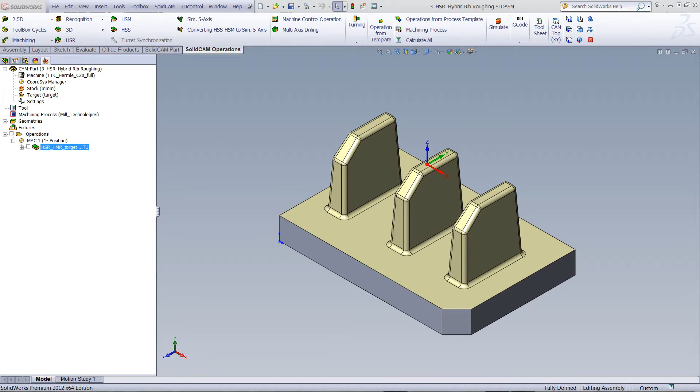If I were to open up my operation, you can see we have the operation of hybrid rib roughing. We have our geometry, we have our tools. I'm using a 10mm end mill. We have our constraint boundaries as shown over here. And then we have our passes. In my passes, I'll be going down up until this surface over here. I've also done a step down of every 1mm, and I'll get back to that in a moment.

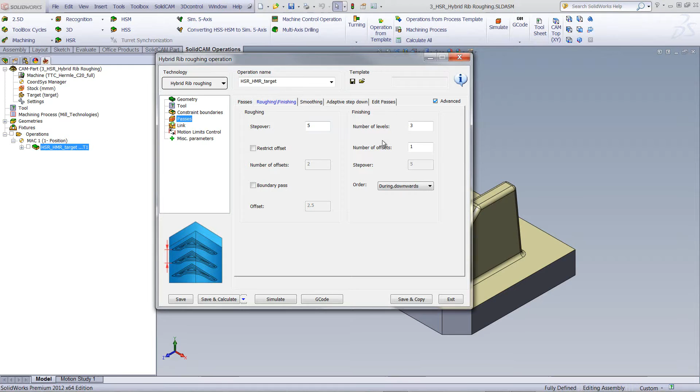Next in our passes field, we have this new option here called roughing finishing. In roughing finishing, we have our step over, how much we want our tool to step over every single time as it gets closer to the actual rib itself. And then we have our number of levels. What number of levels does is as follows.

As I've mentioned before, we had our step down of every 1mm. The number of levels will actually go down that total amount 3 times. In other words, it'll go down 3mm towards the bottom, and then it'll clear it off up until 5mm before the wall itself. Once it gets to that point, it'll clean each step 1mm at a time until it gets down to the level that the roughing cut got to before. Once it does this, then it'll go down to your next number of levels and do the same thing again every 1mm. Let's take a look exactly how this works.

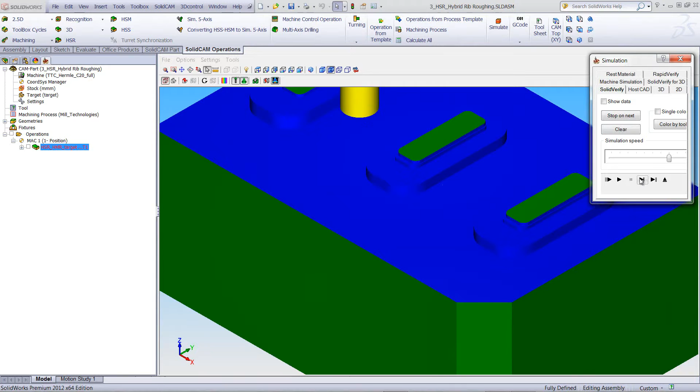If I were to run my simulation, you'll see the tool is working now from the outside, and as it gets closer to the rib, you'll see that it'll stop. And now, I'll zoom in over here. It had cleared down up until here, and now it's going down that 1mm that I talked about. As it goes around the part, you can see now it'll go to the next rib, clearing off 1mm on that one, and then to the last rib over here, again clearing off another millimeter.

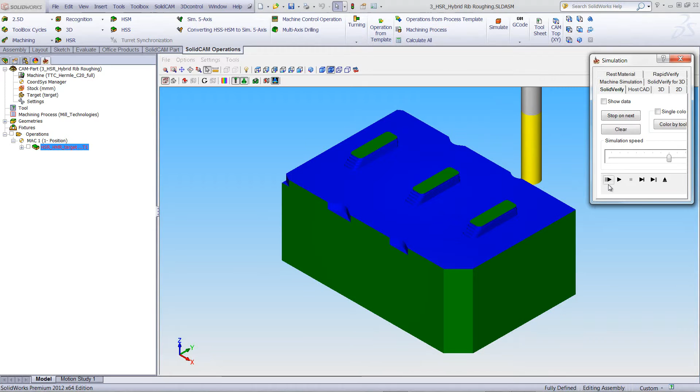Once it finishes that 1mm, it'll then go down to the next millimeter, clearing off that step, again to the next rib, another millimeter over there, and then to the third rib, finishing off that millimeter. Once it finishes off that step, then it'll go down to the next step, and it will do this on this entire part until it gets to the very end over there. Once it gets down to the floor itself, then it'll go down to the next level, repeating the exact same thing it did before, making those small steps.

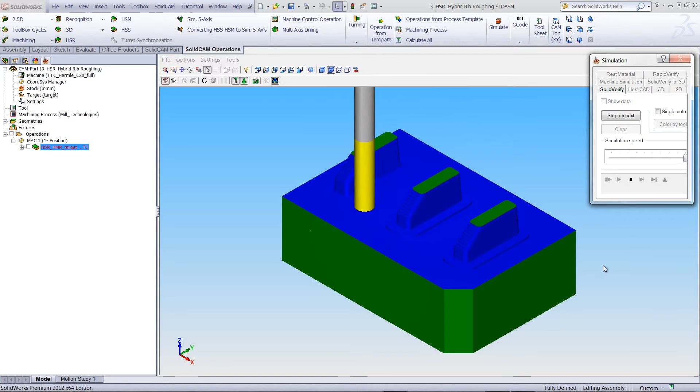And notice the advantage of this is it leaves a lot of material on the bottom, keeping it strong as it's working its way down, avoiding breakage of the ribs as it clears all the way down to the very bottom of the part. Now, let's go back into our passes, into our roughing finishing, and take a look at some of the other options that we have over there. We have here something called restrict offset.

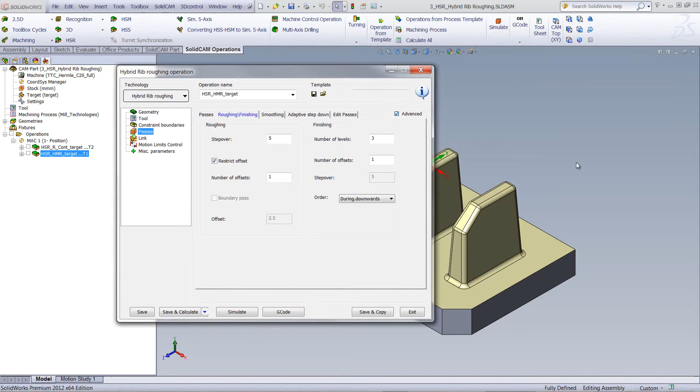What this does is minimize the amount of offsets you're doing from the part itself, and this is especially good when you have a part that was pre-machined and most of the material is taken away already, but there was material left over to do finishing operations.

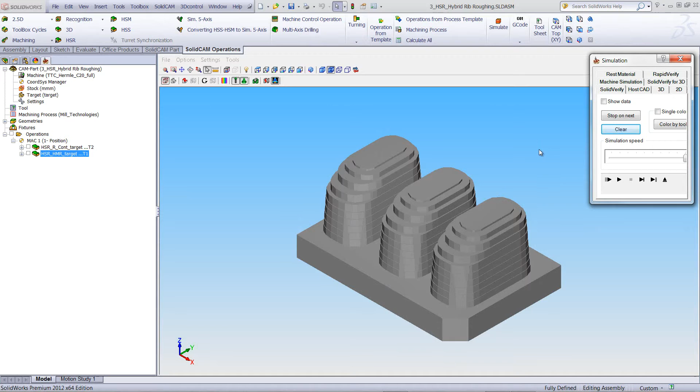So for example, I can have this set at restrict offset for one offset only. If I were to run my simulation, what you'll see is as follows. You can see the material that was left over from my previous operation, and now when I start working on it, it'll do a minimum amount of offsets, only one offset before it does the finishing cuts.

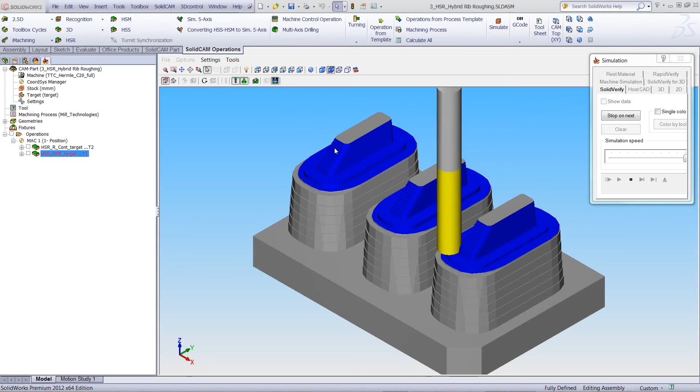So we don't have to always go in from the entire material from the outside as shown over here. It's cutting the exact same way, only doing it, however, with a restricted amount of offsets of one offset before it does the finishing cut, as shown over here.

Now, another option we have here is something called boundary pass. Before I activate this, let's take a look at the simulation for a moment. As we run our simulation, you'll see that it starts from the outside according to the shape of the ribs that are inside, and works its way always with the shape of the ribs. Now, let me stop this now and go to boundary passes.

What boundary passes does is as follows. It allows you to first work on the outside boundary with a pass, say with an offset of 2.5 millimeters, and then work on the actual shape of the ribs itself.

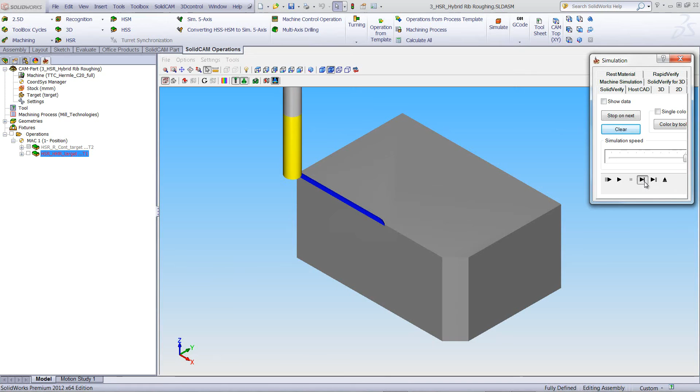If I were to run my simulation, you'll see that it will first clear a pass on the part itself on the outside before taking the shape of the ribs and then working on the shape of the ribs itself. Again, doing it exactly on each step down as well. First the outside boundary and then the shape of the ribs.

Now, another option we have in our finishing is as follows. What we've been doing right now all the time is working our finishing levels during our cutting down. In other words, when we reached that level that we wanted to get to, it stopped, went back up, and did the finishing cut. In other words, during the roughing. And we did it also going downwards each time. In other words, going from our first millimeter, second millimeter, and then to our third step as well.

We can open this up and do during upwards, where it'll go down to its full step and then work its way up, roughing out. In other words, go from its third step to the second step to the first step. Let's take a look at the simulation.

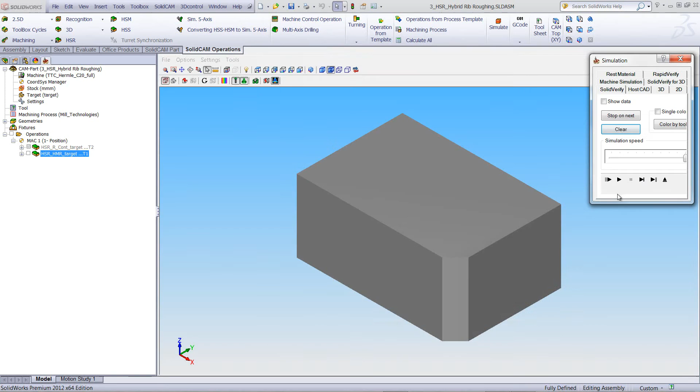And as you can see, after it takes its first step all the way down towards the bottom, this big step over here, and I'll slow this down so that we can see this a lot better, you'll see that it'll work its way up. Let me zoom in now to the step itself.

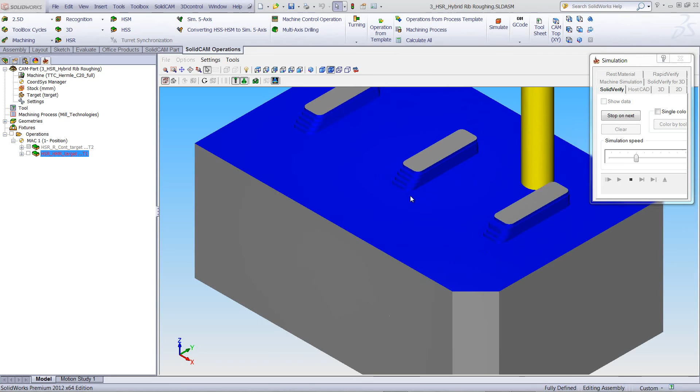And you see it took that first step at the bottom. And now it takes the next step going up, and the same thing on each step. Working from the bottom towards the top. And then it will repeat that at each step following.

Now what we can also do is as follows. We can also open this up and have it do it after our roughing steps. In other words, it'll go all the way down to the bottom, and only then will it start doing its finishing cuts from that 5 millimeters in.

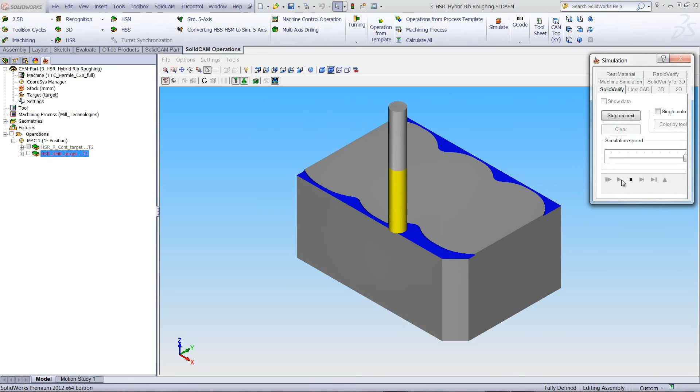If we were to take a look at our simulation, you'll see that it'll do all the roughing cuts all the way down to the bottom, leaving that 5 millimeters on each side on the part itself. And then once it gets to the very bottom of the part as shown here, then it'll go back to the top, going down each millimeter each time to finish off the part.

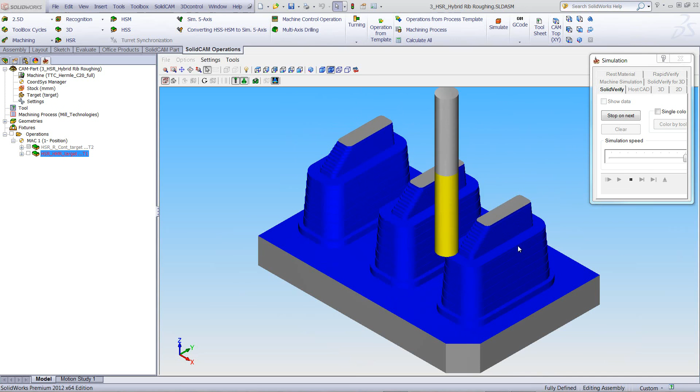A large amount of material to be taken off. And notice it does each one every millimeter and then goes down to its steps.